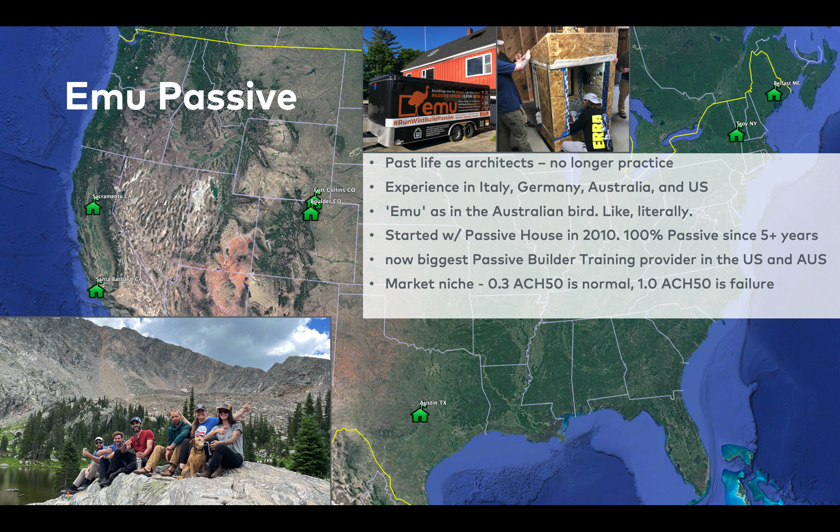We operate in a very niche market where we're lucky because we attract builders and projects that specifically want to go above and beyond, meaning that to us it is normal to achieve 0.3 ACH50 at the blower door test instead of 3 ACH50 that is code minimum. So our buildings are built extremely better than code minimum. In this context, hitting 1 ACH50 is basically a failure because passive house is 0.6.

As I said, we feel privileged because it feels like we may be trainers of Olympic athletes. We attract very smart builders that want to go above and beyond and take pride in the quality of their craft. That is very rewarding to us, and what I'm going to present today is framed by operating in this niche market. That is how we hope the market is going to be in the future, where builders have extreme pride in what they're doing and they're delivering great projects supported by the passive house building science.

So today we're going to cover how a performance-based building science handrail can help projects improve not just in terms of energy efficiency and environmental impact, but also how to improve the living conditions for people inside buildings, based on the most recent and up-to-date building science, something that building code is decades away from adopting.

Start with this question: why do we put numbers on money bills? Money is a very important commodity, and why do we put numbers on it? In my opinion, George Washington was a much better president and person for the country than Benjamin Franklin. So, in my opinion, George Washington is a much better bill than a Benjamin Franklin. Now, would you give me one Benjamin Franklin in exchange for one George Washington? You wouldn't do that.

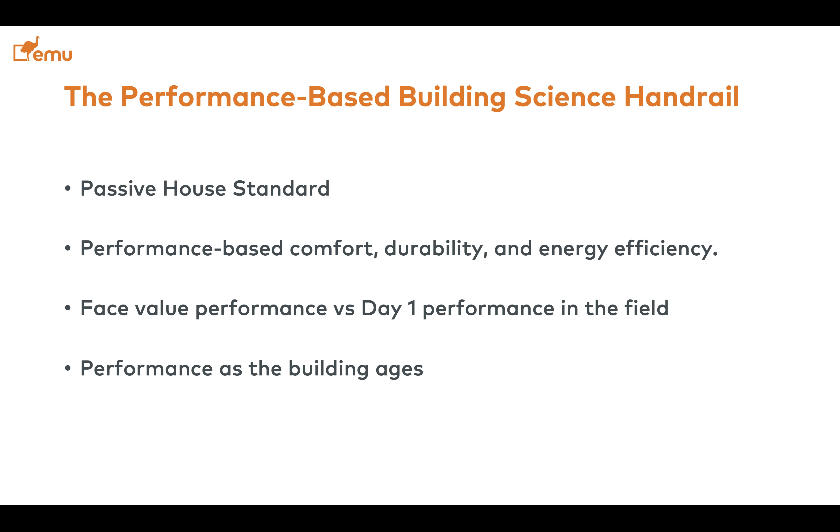So this is a short summary of what I'm going to present on today. I'm going to touch very shortly about the passive house standard, what it is, talking about performance-based approaches to comfort, durability, and energy efficiency. Then look at face value performance of certain products as opposed to how those products actually perform in the field at day one, as well as how this performance ages over time once the building gets older.

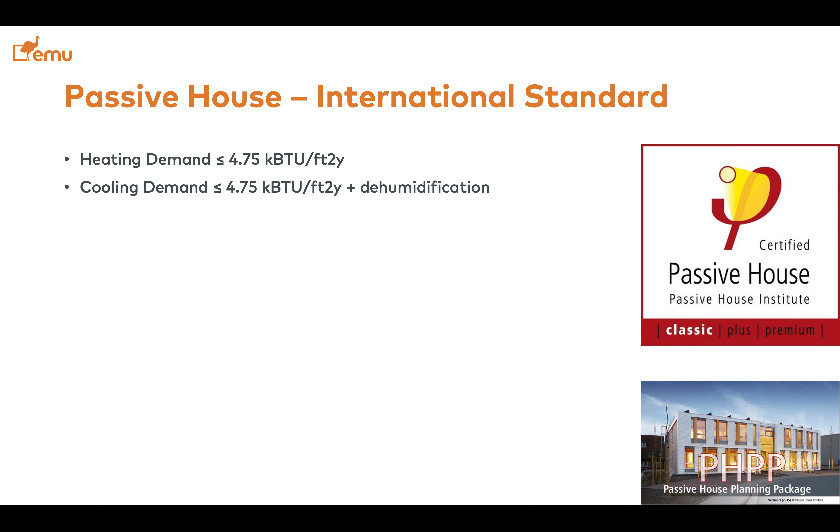So this is the definition of the International Passive House Standard. A building can be certified if it has a heating demand of less than 4.75 kilobtu per square foot a year, as well as a cooling demand of less than 4.75 kilobtu per square foot a year, plus some additional allowance for climate-specific dehumidification, primary energy less than 19 kilobtu per square foot a year, an air tightness level of less than 0.6 air changes per hour at 50 Pascal as measured at the final blower door test.

Then there's a specific criterion for indoor air quality that requires continuous balanced ventilation through an ERV or HRV system. There's a comfort criterion which impacts the selection of windows and doors that is specific to the climate. We're going to see that today, as well as prevention of mold and condensation by design, which is called the hygiene criterion. Hygiene is absence of mold and condensation.

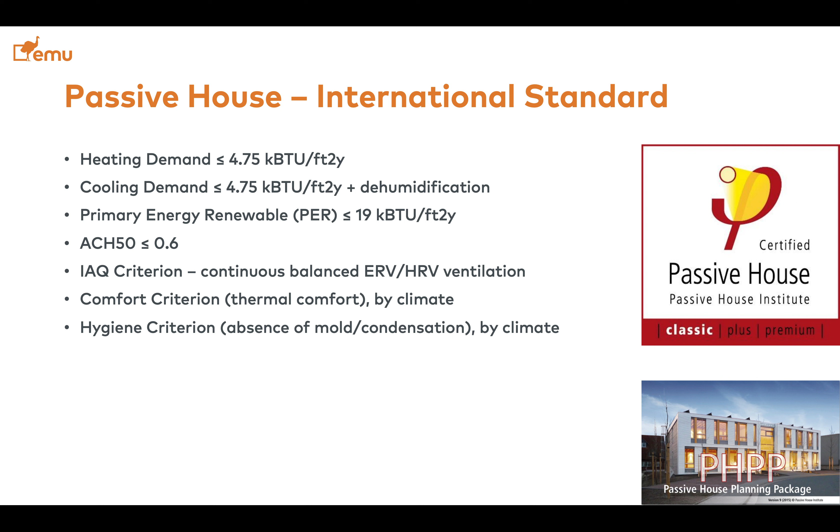And this is an analytical approach to preventing mold and condensation that is decades further advanced than what building code currently requires. So it is a way that we professionals can advise and inform decisions of our clients and our builders on how to prevent mold and condensation proactively, as opposed to just building the building and hoping nothing bad is going to happen.

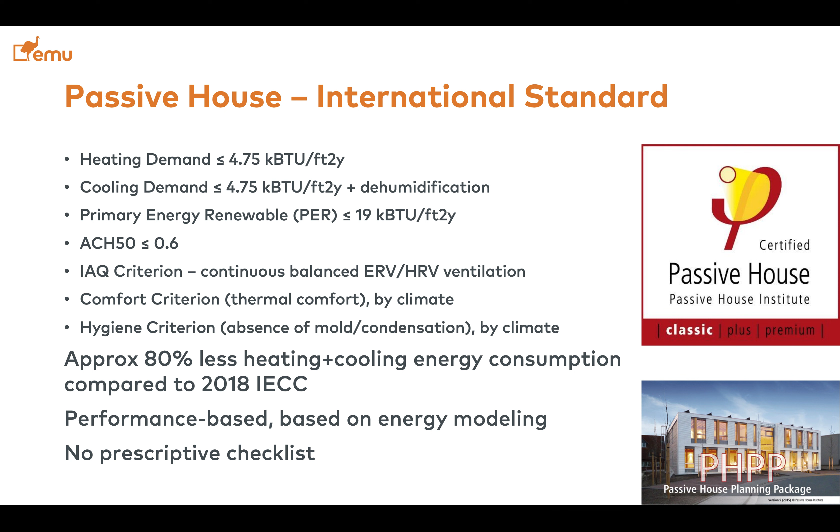Coming from Europe, in Europe there is no prescriptive code compliance. It's all performance-based. And when I think about the prescriptive approach, it's when you already know the answer before you even formulate the question. Think about a project in climate zone 4, where your walls are R20, and your ceiling is R49.

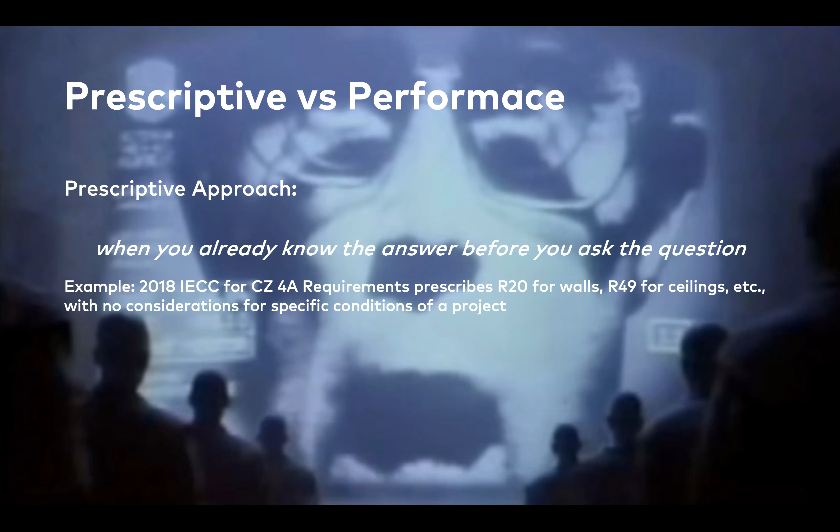This takes no consideration of what the project actually looks like. It does not consider at all the design, nature, exposure of that specific design. It does not ask a question, it just gives you the answer. Your climate zone 4, R20 for your wall, and R49 in your ceiling, and all the other requirements. And to me, that is a very dumb way to approach performance and building science, because you literally don't ask questions. You just have a set of prepackaged answers that you distribute flat by climate zone, as opposed to a performance-based approach where you actually listen to the question before you formulate an answer.

We're going to see what that means later today.

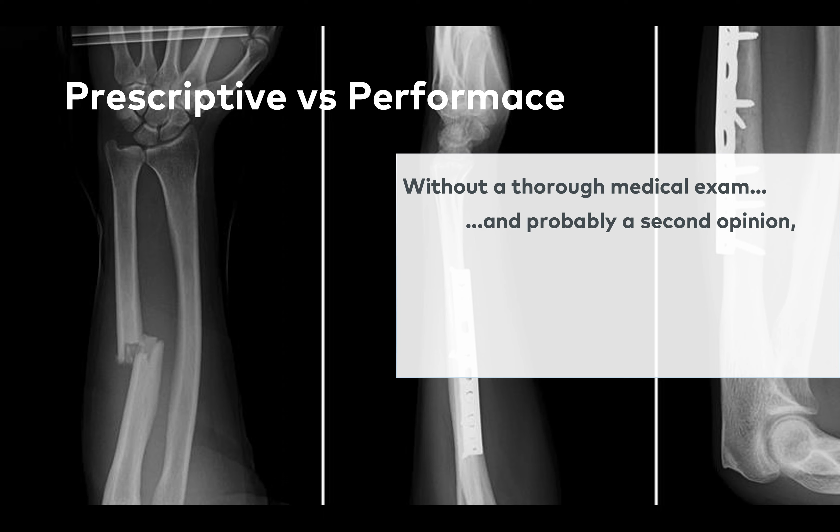Think about an analogy with the medical world. Without a thorough medical exam and probably a second opinion, would you ever start an expensive medical treatment, take restricted medical drugs, or undergo serious surgery without an actual medical exam first, and possibly asking a second doctor for their opinion? That is what the prescriptive method is.

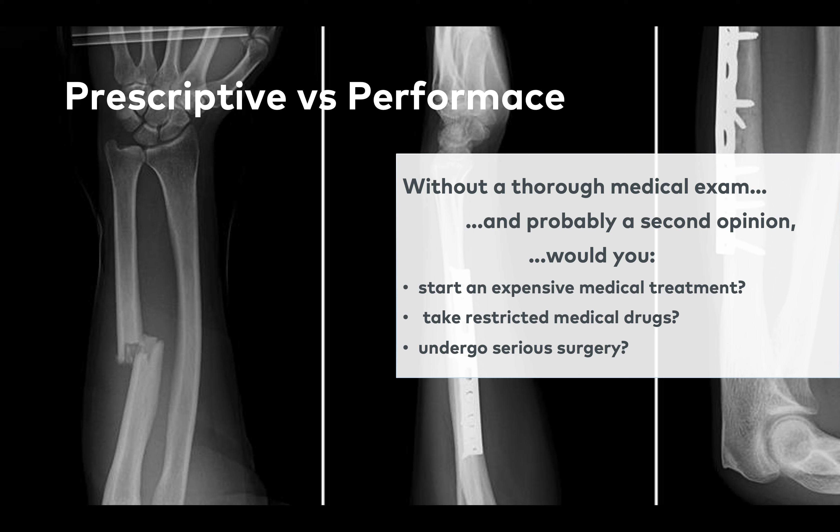To draw an analogy with the medical world, energy modeling is similar to having a thorough medical exam that tells you how things are going. This picture has X-rays because I see the energy model as X-rays of your building. It tells me how different components are performing with regards to different metrics: thermal comfort, avoidance of mold condensation, as well as energy efficiency. Once you have the information from that exam, you can make informed decisions about how to move forward. If you don't, you're just guessing.

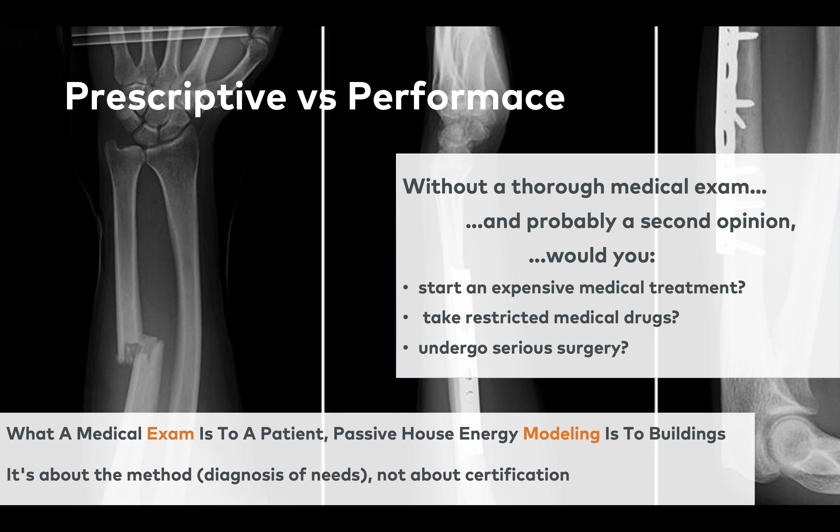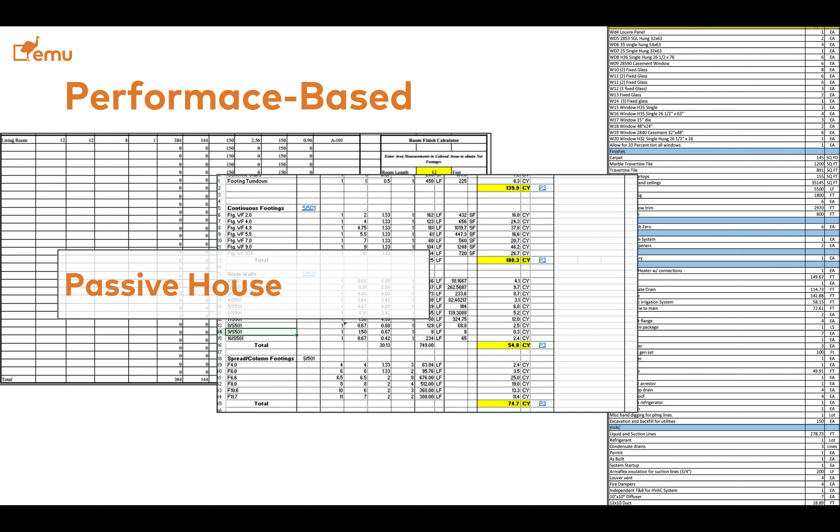Performance-based Passive House involves a lot of numbers, and we're going to see some today. The good thing is these tables are actually not unique to Passive House, they come from construction takeoffs. Builders go through a lot of math exercises with construction takeoffs. So in my opinion, if you have the patience and strength to survive a construction takeoff, you have enough brain power to also go through Passive House and survive, because it's actually very fun.

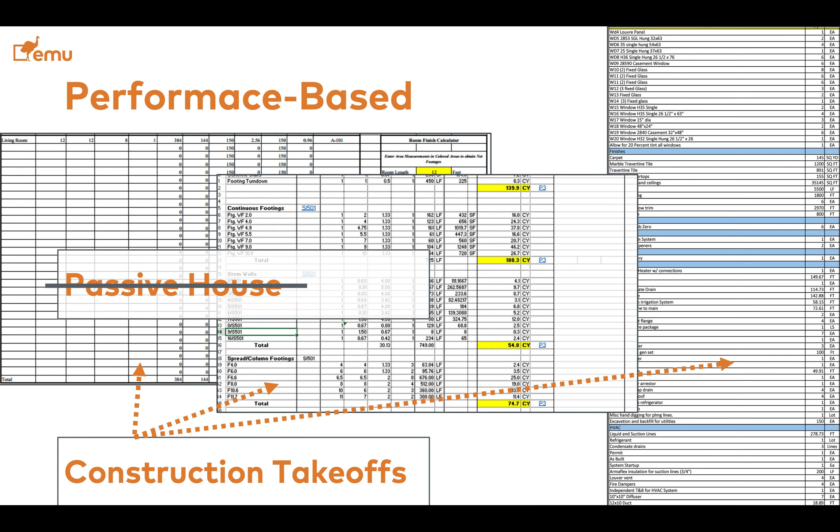Performance in that statement is not just energy, it's also thermal comfort. We're going to see how that greatly impacts the selection of windows and doors, which is one of the most expensive line items of the entire budget, as well as indoor air quality and energy efficiency.

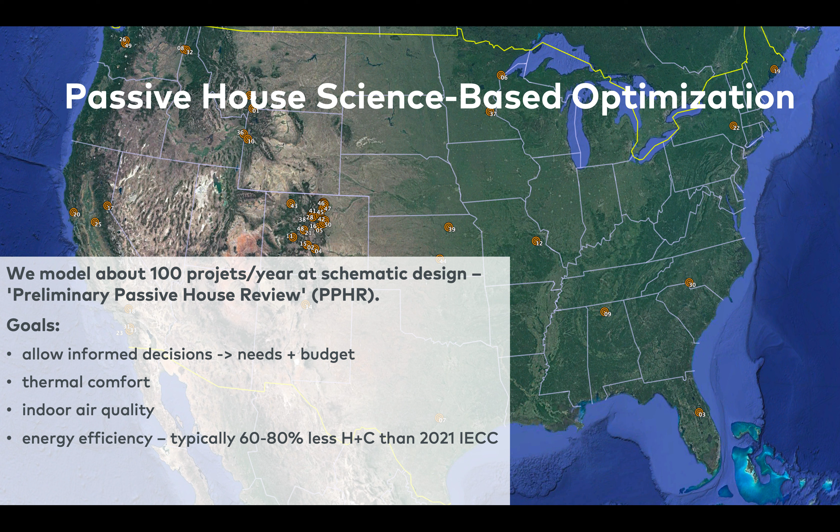In doing that, we typically see these projects reducing the need for heating and cooling by about 60 to 80% compared to even the 2021 energy code. So great opportunity for improvement compared to code minimum compliance. About 20% of these projects we actually recommend certification and support them through construction. For the other 80%, this process at the early stage allows them to really narrow down what they need so they can make informed decisions on how to develop the project and budget further past schematic design, and optimize performance for their climate as well as the project-specific goals.

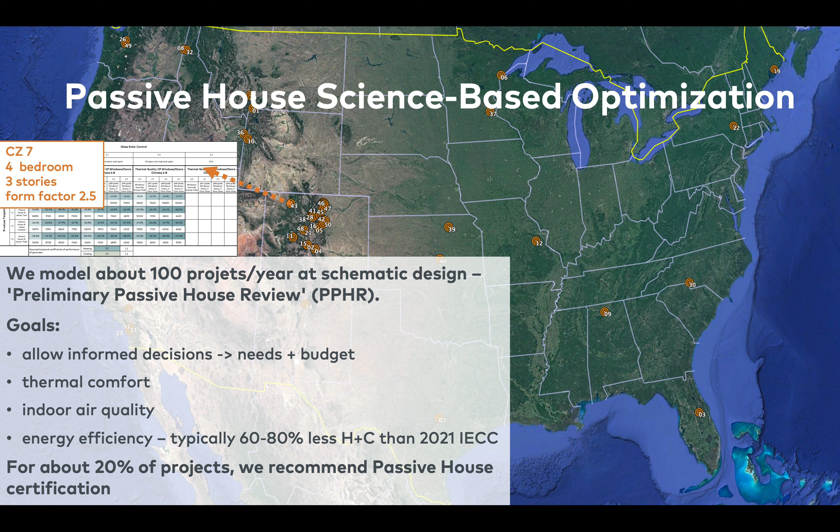Top left is an example, one of the many projects we model. A project in Climate Zone 7, 4-bedroom, 3 stories, form factor of 2.5 — we ended up speccing triple pane windows, high solar gain glass, R60 walls, etc. Another one, for Climate Zone 2, was a much smaller unit: 2 bedrooms, 1 story, form factor 3.8, and we ended up speccing double pane windows, low solar gain, R20 walls, etc.

This Florida client was excited about being the first project in Florida to use triple pane windows for Passive House — and this project is going to be certified. He said, 'Oh yeah, we're gonna be the first one to use triple pane windows.' I said, 'No you're not, because you don't need that.' And if you don't need something, then don't buy it.

What is the need about windows and doors? Why do we need triple pane windows? We don't need triple pane windows, we need to feel comfortable. Passive House provides the science that allows you to determine the minimum performance for windows and doors you need in order to get comfortable. In Florida's case, it never gets that cold, so you don't need the extra thermal protection of triple pane windows. Whereas for the project in Climate Zone 7, which is super cold, we definitely need that thermal protection. This is an example of how an energy modeling, Passive House-based approach helped two different projects make decisions in terms of identifying what they need and allocating budget resources to meet them.

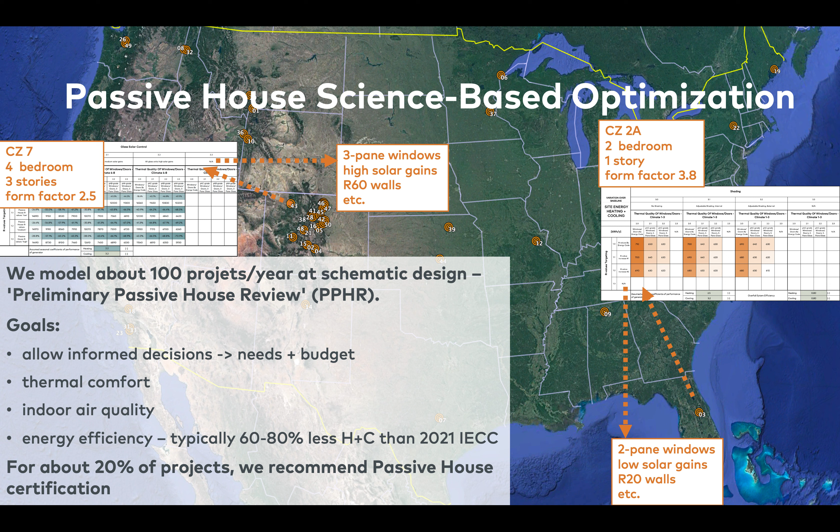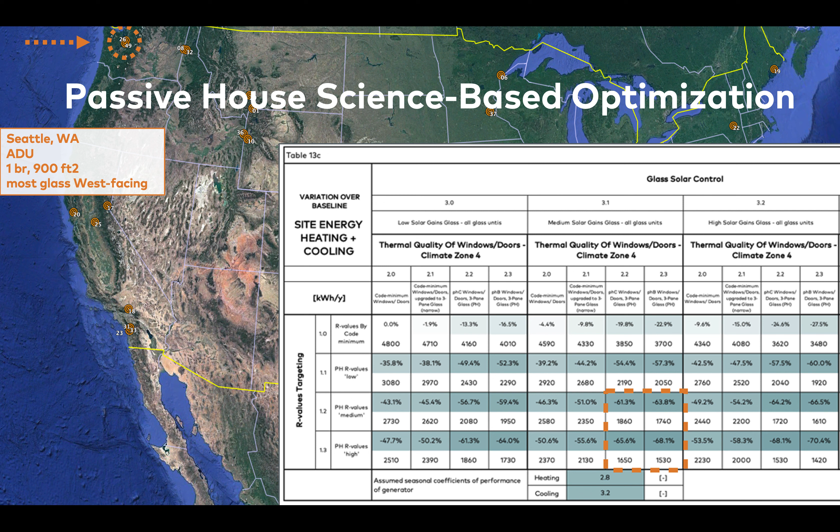More importantly, we did a thorough analysis on comfort. So in the metrics we cover, we provide recommendations for the window package in order to determine the comfort requirement, then we looked at how to optimize the glass for year-round performance. We called out low solar gains, medium solar gains, and high solar gains.

With the premise that most glass is facing west, if you don't have the support of an energy model, you may believe that you want all of your glass facing west to be low solar gains, so you block off a lot of that heat in the summertime. At face value, that is what you may think if you don't have an energy model to give you answers. So if you're pulling numbers out of your butt, you may think west facing always means low gains glass, which really depends on the climate.

This is Climate Zone 4C, and this building is in a city. This building is not in a vacuum, we're not building on the moon here. This building had other neighboring buildings around it and trees, which caused shading. So the models showed that even though most of the glass was facing west, for the best performance for heating and cooling, going with medium gains was much better than low gains. This is something that only the energy model can help you navigate.

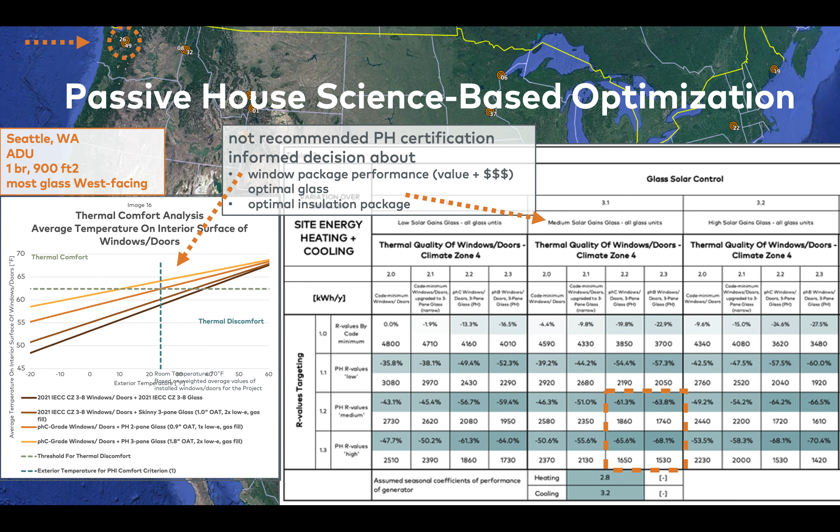This is a market, the high performance market, where the moment you start wanting to invest more money in a project, you'll find plenty of people that want to help you do just that, spend more money. Whether you get to the actual performance goals that you want to achieve, that is a completely separate matter.

This passive house modeling-based approach really provides you the ability to quantify the impact of option A over option B and C. So how much does option A change things, and how much does it matter compared to B and C? If you don't have an energy model, you don't have an analytical way to address that. So it's not that we just like energy modeling, we don't like to make up stuff, we use the science to help clients make informed decisions.

This slide shows the range we're working in in this market today. At the bottom, we see building code, the minimum level of performance you are legally allowed to build today. In other words, a code minimum building is the worst building that you are legally allowed to build. That is literally the definition of building code. Then on the other end of the spectrum, we have the gold standard, passive house, which compared to the 2018 and 2021 code allows a reduction of about 80% for heating and cooling.

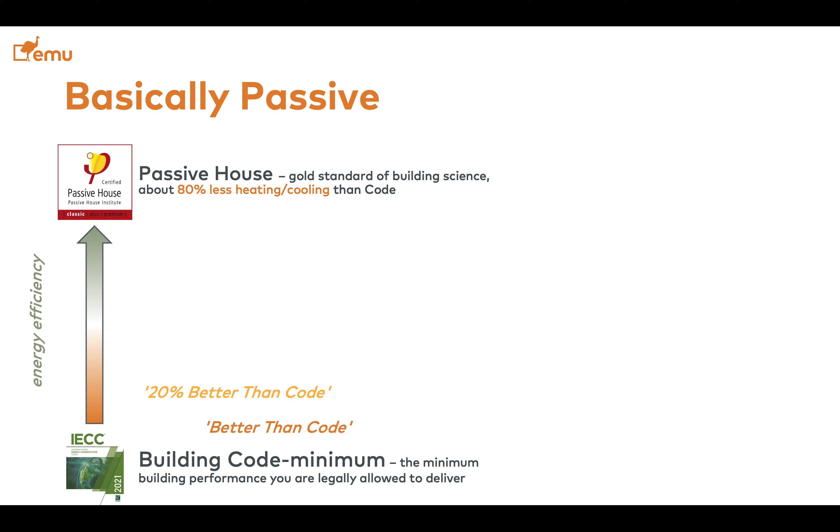Now, in between the two, there's a number of foggy, undetermined definitions or names that kind of confuse the market. 'Oh, my building is better than code.' 'My building is 20% better than code,' based on having done no modeling, so you don't actually know what you're talking about. 'My building is high performance.' We literally know builders that put a quarter inch more insulation than code minimum, and they call the building high performance. And that is high performance, it is higher performance than the code minimum, so they can say that.

Is that passive house? No. Is that actual high performance? It depends, it's not really. It can be all the things. Literally anyone down the street can claim they have a high performance building if they put an eighth of an inch more insulation than code minimum, and that is higher performance than code.

There's super insulated, there's super tight, zero utility house, passive solar that is basically passive but haven't done the modeling. All of these we call the floaters, meaning they float in between the code minimum and passive house. And there is some substantial risk there because you don't have structure.

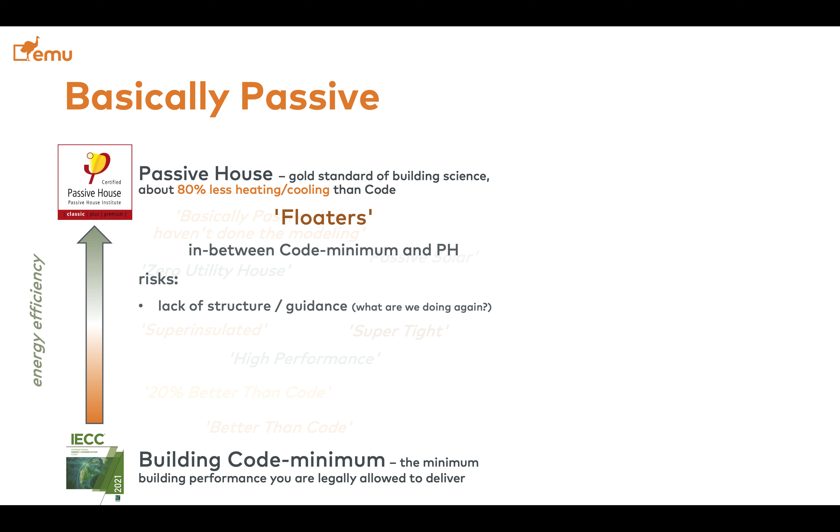Building code does provide you structure, it provides you a minimum that you cannot fail. Passive house does provide you structure, it's basically a performance-based building code of the future, and it provides you with very strict requirements that on a performance-based approach you can meet. Those are structures. Anything that floats in between passive house and code does not have this structure. So what are we doing again?

It's very difficult to define expectations with the client. If you want to do code minimum or passive house, you have very specific goals. If you don't have these specific goals, everything becomes foggy and unclear, and it becomes very difficult to determine expectations with the client.

It's very easy to overpromise and underdeliver. We're going to see an example of just that today. And it's also very easy to overkill and overpay, for example, for the window package. The client down in Florida wanted to get the triple pane, and had we not done the thermal comfort analysis, they may have gotten the triple pane and spent thousands of dollars more on windows that was unnecessary for the climate location. And it can be underkill in terms of indoor air quality and moisture management.

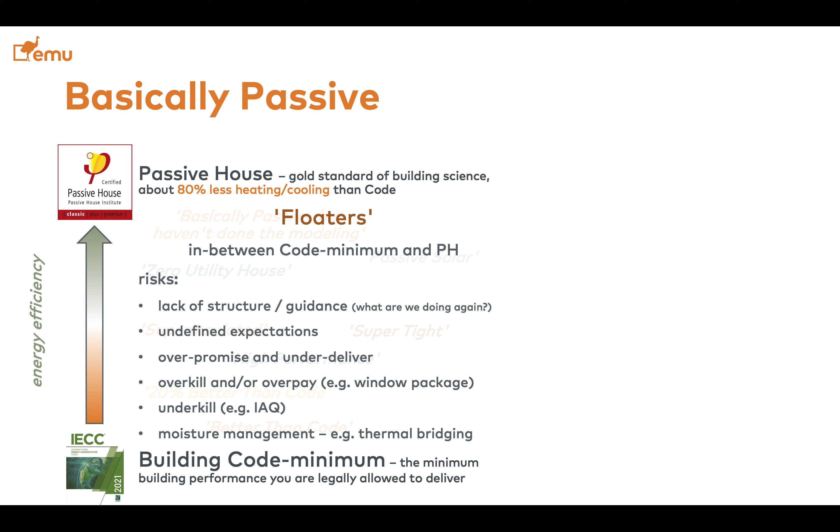Now, think about the analogies that we did for the medical field. Think about going to the hospital - what makes you feel most confident about the competency of the doctor? 'Your arm is broken' or 'your arm is basically broken.' Which one of these makes you feel more confident about the competency of that doctor? It's broken, versus it's basically broken.

This is the same situation we see in the building market. It's better than broken, it feels like it's broken, and you know X-rays are bullshit. And what MD degree, don't you see the scrubs? There's a lot of fun you can have, but think about what you hear in the market. Like, oh, it's high performance. Oh, we don't need to do the modeling, I know what it is. And that's bullshit.

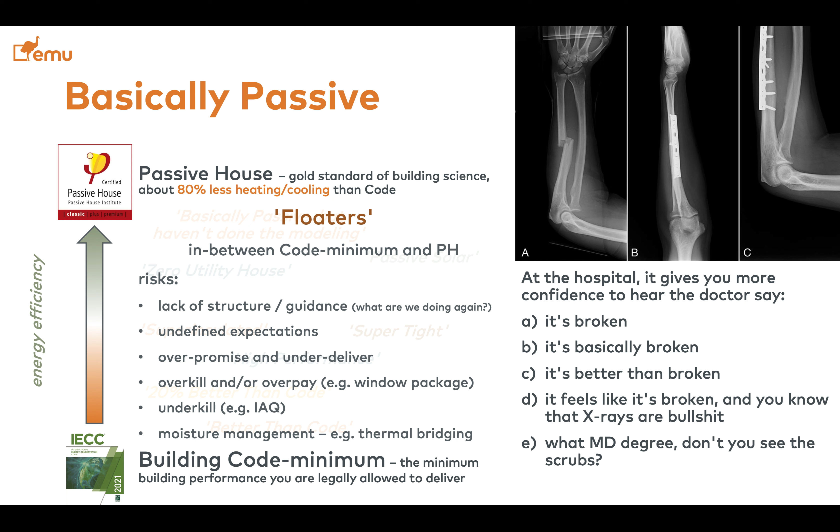At the end of the day, we're making a promise to our clients, and we need to deliver on that promise. This is all what this is about. Whichever the promise is, we need to deliver on that, whether it is passive house certification or not, or code minimum. We promise A, we need to deliver A.

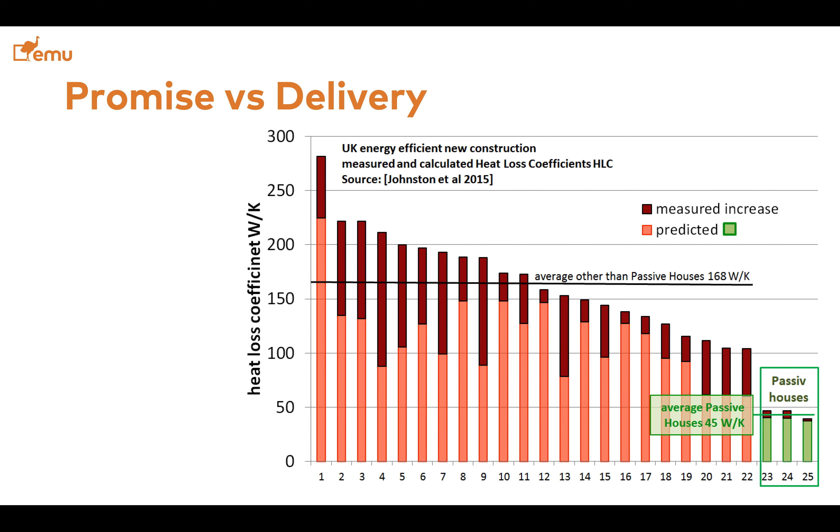This graph shows data collected from 25 buildings in the UK, where there was an expectation as far as energy consumption, and some buildings greatly consumed more energy than what was anticipated. So we have the promise - hey, your building is going to need this amount of energy - and there was under-delivery, where that building actually consumed a lot more energy than expected. This is called the performance gap.

Now, this graph also shows a few passive house buildings where, because of a number of reasons, the gap was the narrowest on record. This is typical for passive house, where it's a much more detailed, performance-based approach. It's very strict in terms of requirements and quality assurance, and so what you actually promise, you do deliver, as opposed to over-promising and under-delivering.

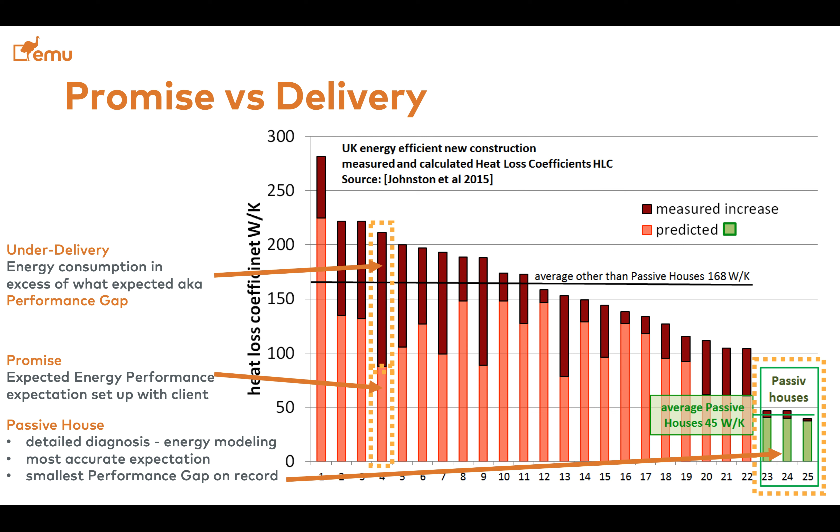Now, to make this a little bit more fun, I created a little story to describe a process, to illustrate how things can go well or poorly depending on the approach you take on a project. So I made up the story of two twin brothers. One is Enrico - that's me, and Enrico has an accent, as you can tell. He's very much a square, and he's contracted to build a passive house. His very evil twin brother, Enrique, also has an accent, Googles a lot, and is contracted to build a house identical to Enrico's. This is how the story goes.

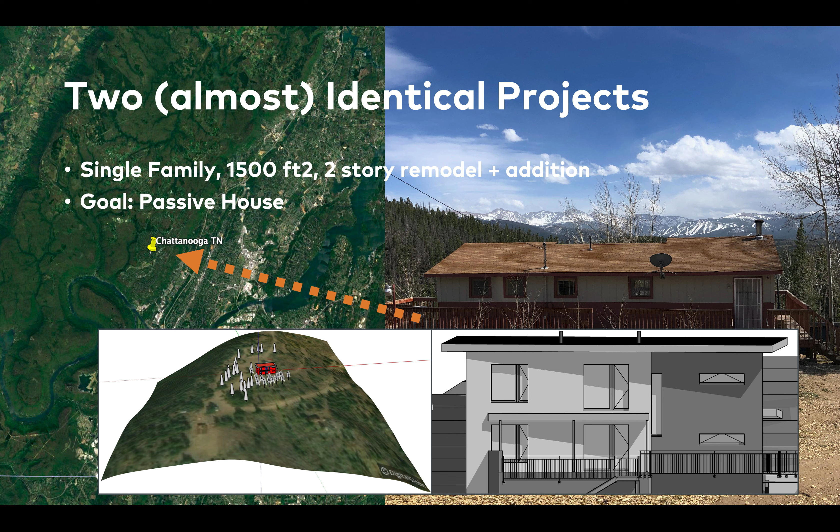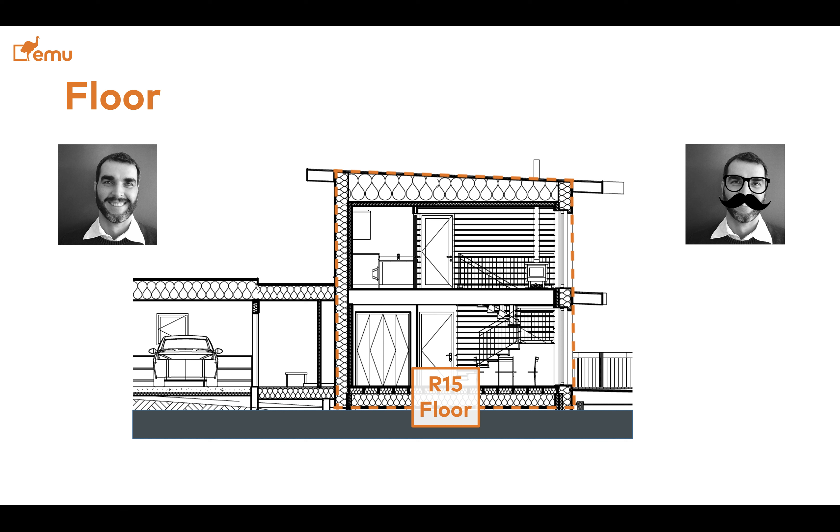So I'm on a ridge, there's trees around, some of them evergreen, some deciduous. Starting from the bottom up, for the floor in Chattanooga, Tennessee, which is climate zone 4A, I need R15. So Enrico picks 4 inches of EPS under slab, and Enrique chooses 3 inches of XPS under slab.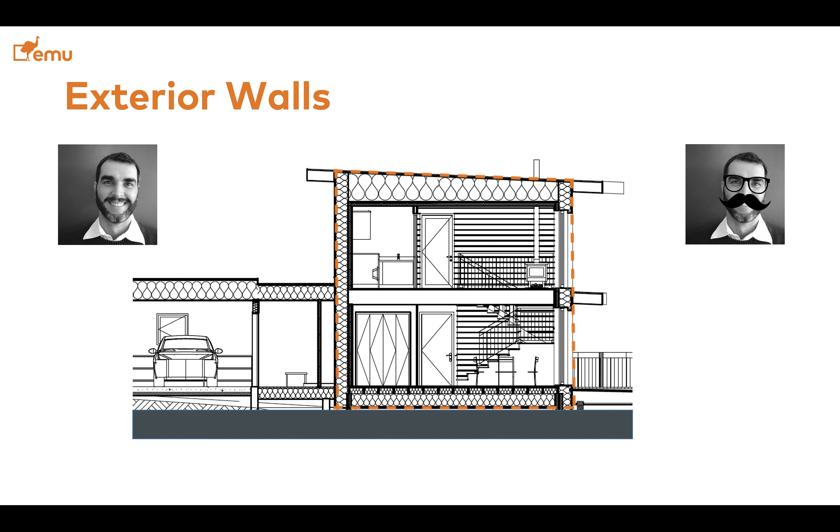For the exterior walls, we need R30. Enrico picks a wall consisting of drywall, dense pack cellulose in the 2x6 cavity, plywood sheeting taped at the seams as the air barrier, and then 2 inches of exterior continuous polyiso insulation under the rain screen. On the other side, Enrique uses drywall as his air barrier, the same dense pack cellulose in the 2x6 cavity, and then uses 2.5-inch zip R sheeting as the continuous insulation, and over that goes the rain screen.

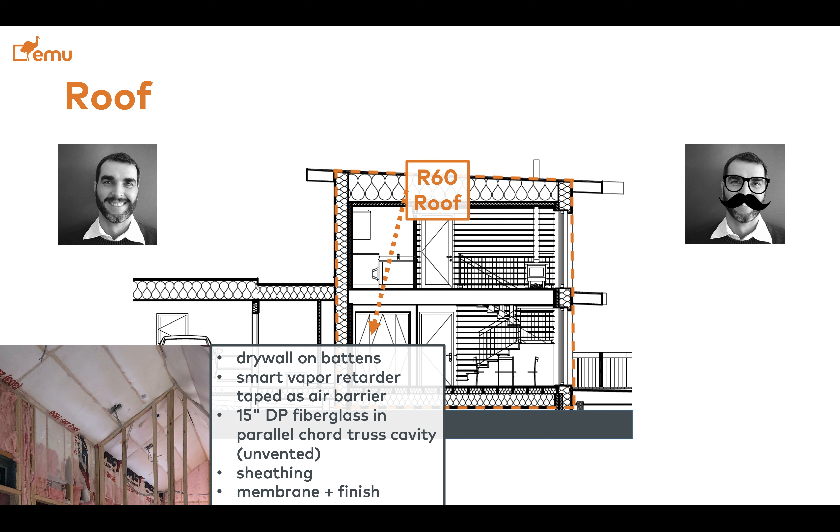At the roof, we need an R60. So Enrico uses a smart vapor retarder as the air barrier and 15 inches of dense pack fiberglass in an unvented roof assembly. Whereas Enrique uses drywall as the air barrier and then 8.5 inches of closed cell spray foam, sheeting, membrane, and finish.

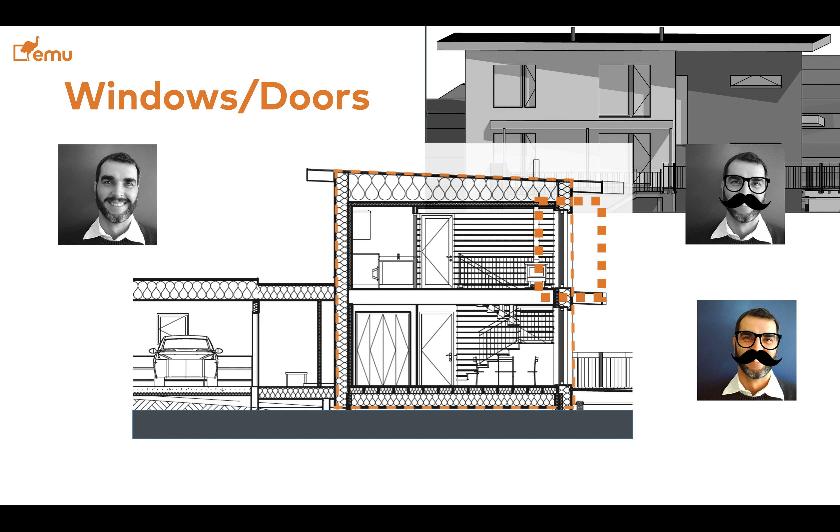Windows and doors, keep in mind what this south elevation looks like. Enrico is not that concerned about overheating, whereas Enrique is. Enrique uses C-grade passive house frames with warm edge spacers.

We don't have too much time to go over this today, but keep this in mind. Enrico uses beefy triple pane glass, so the overall thickness of the glass unit is 1.8 inches, basically 2 inches of glass assembly, with 90% argon fill, medium solar gains, and an inward window install. We'll cover that later, but you see the building section here where the window is installed in the middle of the insulation thickness. Enrique, on the other hand, also uses a C-grade window frame with warm edge spacers, but uses a skinny triple pane.

So the overall thickness of the glass unit is 1 inch instead of the 1.8 inches for Enrico. Enrique googled and found that somebody on the internet says the argon gas goes away after only a couple of years, so it's not worth investing the money. So Enrique uses air-filled window glass instead of argon.

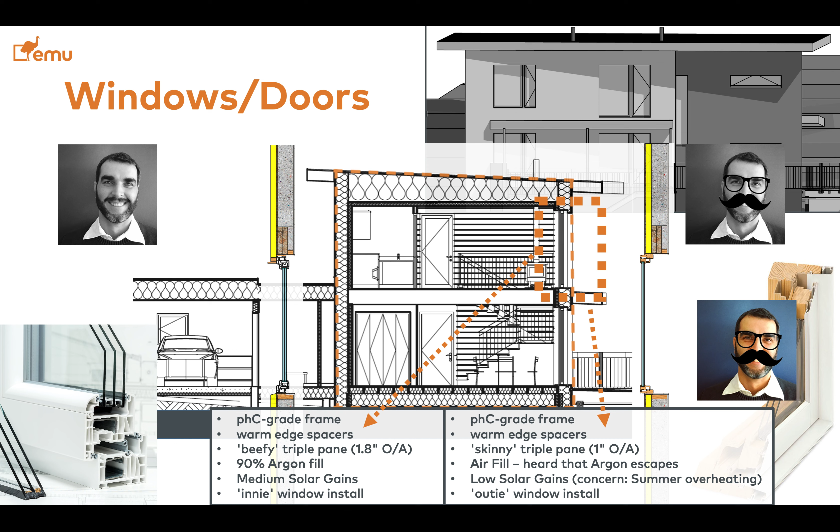In terms of heat recovery ventilation, Enrico chooses a ducted ERV with 87% heat recovery and a MERV 13 intake filter, whereas Enrique uses a ductless HRV with 89% heat recovery. We're going to see what that means.

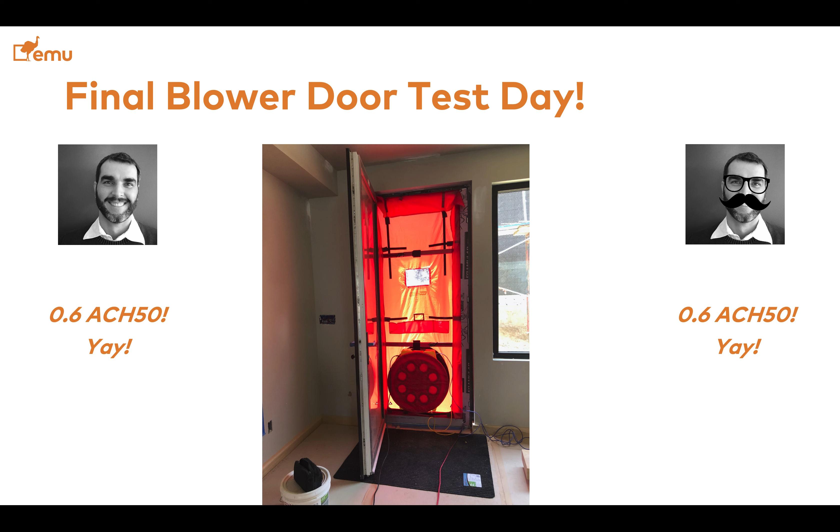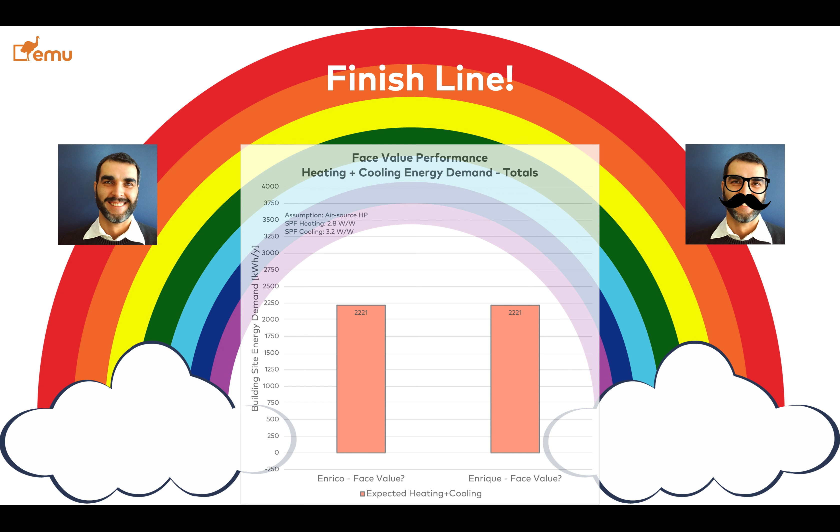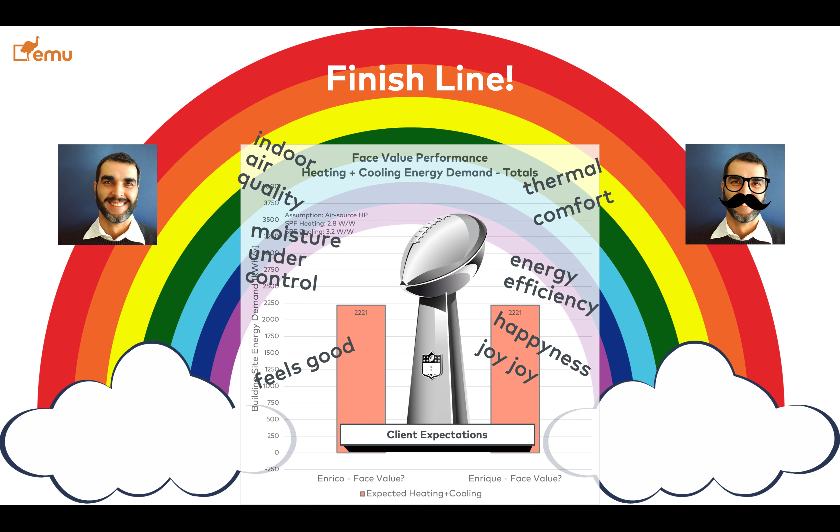They build the building and get to the final blower door test. Enrico gets 0.6 ACH50, yay. Enrique also gets 0.6 ACH50, yay, everything is happy. At this point, both of them reach the finish line of the project, and at face value the two buildings perform the same. So we're happy, we've met the client expectations, we have indoor air quality, thermal comfort, moisture under control, energy efficiency. It feels good, happiness, joy, puppies, kittens, yay.

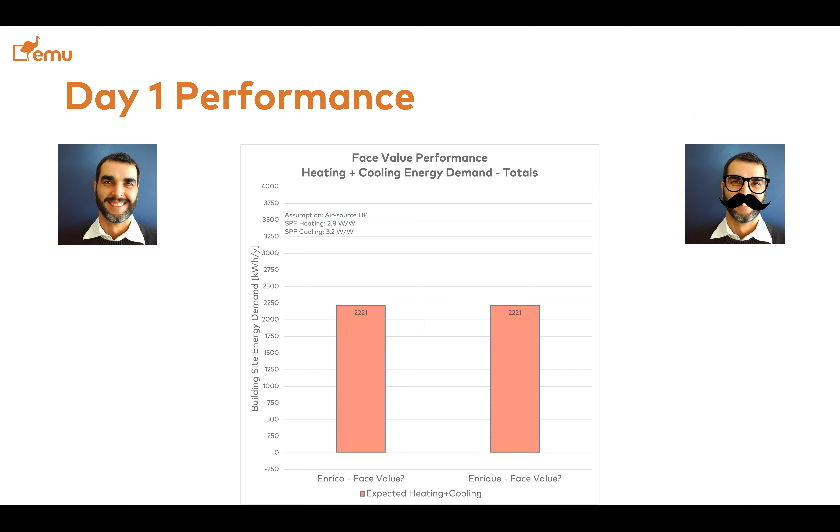It feels good to finish a project, until it doesn't. Day one, things start to go poorly. Enrique's client starts seeing that the energy consumption is actually much higher than anticipated, actually two-thirds higher than expected. Let's see what happens.

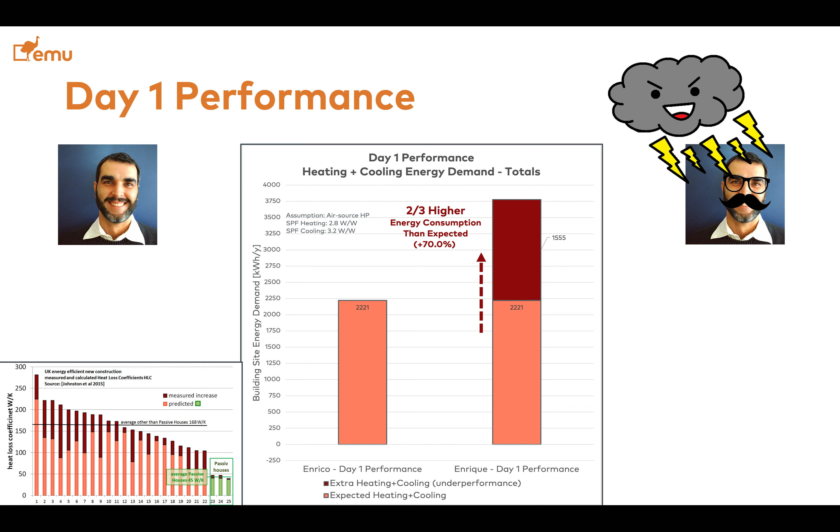This is the relationship we were talking about, where we make a promise and have to deliver on it. In this case, we under-deliver, in that the actual energy consumption is much higher than anticipated. In addition, Enrique's client has condensation and is very uncomfortable because they feel cold in the house. Let's see what happened.

Enrique was good enough to Google which metal is least bad, and stainless steel is the least bad metal out there, less bad than regular steel, less bad than aluminum, less bad than copper. These are all metals used in construction, and we see this all the time with builders who post photos on Instagram like, 'oh, this is my metal sill pan under my window' — you are shooting yourself in the foot. They don't actually know what they're doing.

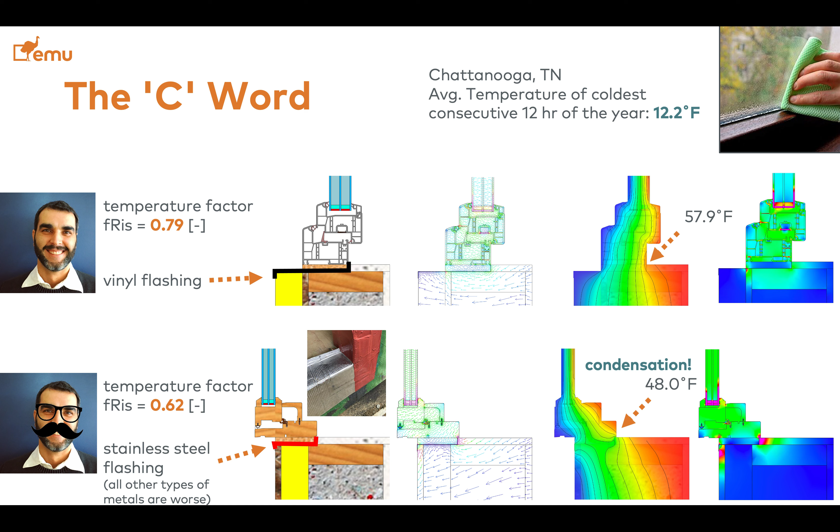And passive house, this is one of the hard requirements for certification. You do not need to certify, but you want to use this science to prevent mold and condensation. And building code is decades away from adopting this. So you can definitely have a building that is moldy and does comply with the most recent energy code.

Then the second line item, before we get to energy efficiency - the first one was condensation, the second one is discomfort. And at face value, they both picked triple pane. So this is one of the things that throws most first-time builders off. You are getting a triple pane window, you may get a good one, and you may get a pretty poor one, and you're still paying the premium for the poor one.

So this is why it's very important to look at this. To deliver a higher quality product, you need to have a much smarter, more intelligent approach to it. Higher quality products don't happen just randomly. You just have to have a much more thorough approach to get there.

Now, Enrico, on the left, has a beefy triple pane, it's filled with argon, has low-E coating, and has an innie install, meaning that the window is in line with the middle of the insulation. Enrique, on the right-hand side, also has triple pane, but it's a skinny triple pane. It's filled with air, has low-E coating, and has an outie install, meaning the window is installed all the way to the outside. And the U-factor is basically the amount of heat losses that we have through that window.

So if you see a U-factor, think about losses - the higher the heat losses is bad, and the lower heat losses is good. So nominally, both windows are triple pane, yay! But if you look at the actual losses, the one on the left that Enrico picked has 0.13 heat losses, BTU per square foot per degree Fahrenheit per hour. So 0.13 as opposed to 0.26 of the other triple pane.

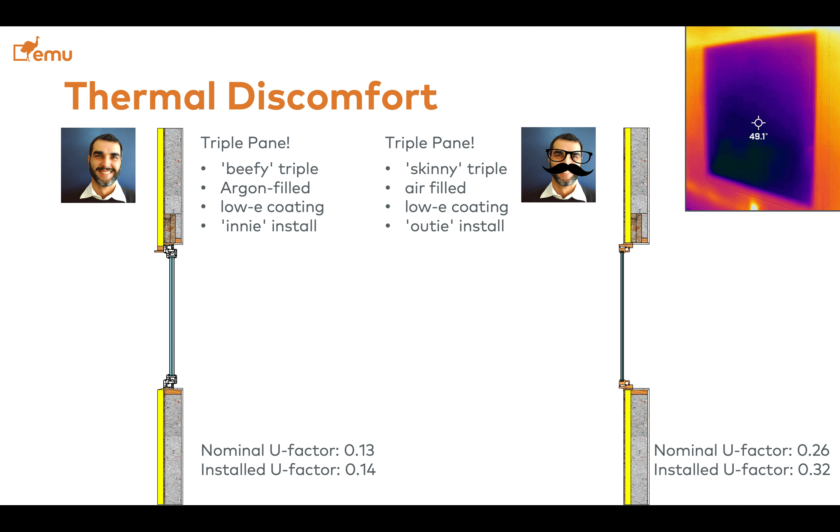So the triple pane that Enrique picked, probably because it was cheaper, but not necessarily - some skinny, bad triple panes are actually more expensive than the good ones - actually has twice as much heat losses compared to the losses that Enrico's windows have.

And if you think about the infrared view, these two isotherm views, the rainbows here, show the black lines. The black lines are called isotherms. Those are lines with the same temperature. And isotherms are like lazy - they want to go slow and straight, they don't like to make curves. If the isotherms make curves in your model, it means that something is not going well, and that causes condensation or higher heat losses.

So on the left-hand side, Enrico has chosen to install the window in the middle of the wall insulation thickness so that the isotherms are going to go straight. So if you look at the isotherms at the bottom left, they're pretty straight in the middle of the wall, and straight up, if you draw a vertical line over the building section, that is where the glass is, so the isotherms kind of go straight, and they're happy if they go straight.

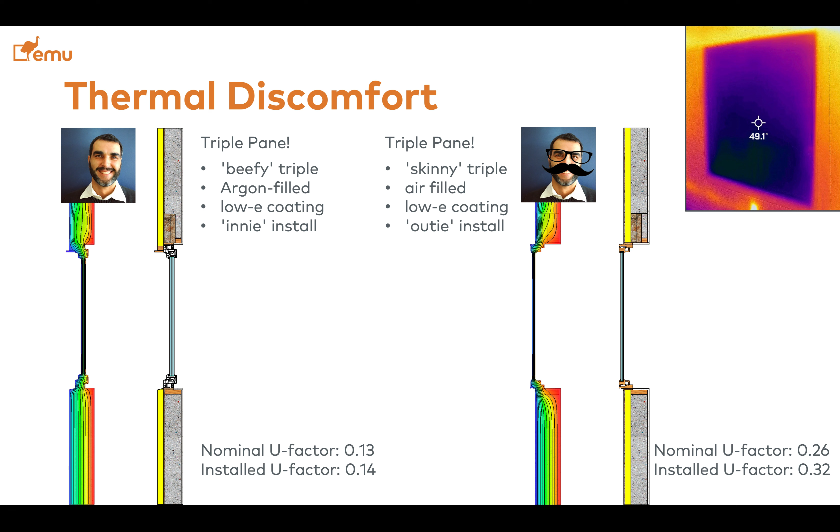Now, Enrique, on the right-hand side, has an outie window installed. And if you look at Enrique's isotherm view, the black line in the rainbow picture on the right-hand side, you see that at the bottom, the isotherms are in the wall. They are nice and straight and go up. And all of a sudden, they have to turn left to get into the frame and then up along the wall, along the glass, and then back out to the right, up to the wall. Isotherms don't like to do that. And if they do that, it means there's a lot of heat losses associated with those changes in direction. And this is something tangible.

The better window with the better glass, with the better installed details, in the Chattanooga, Tennessee climate, with 30 degrees outside and 0.13, 0.14 nominal versus installed U factor, that is something that leads to having an average temperature on the inside of the window of 65.8 degrees.

This is science. This is not a plaque. This is not certification. This is actual building science. Based on the climate and based on the window installed U factor, you can actually calculate and quantify the level

of comfort. And this is something that clients do care about. They will spend more money to get the better window. And Enrique, on the other side, has the skinny glass, has the outie window installed, so he loses more than

5 degrees. His surface temperature is 60.6 degrees. So this is something that is noticeably colder, and sitting next to Enrique's window, you would feel the temperature difference. You feel it because our knowledge of thermal comfort tells us that if the temperature delta between the room average and the cold surface is greater than 7.6 degrees, then our body

can tell the difference and we feel uncomfortable. So assuming a room temperature of 70 degrees minus 7.6 equals 62.4 degrees. So Enrique has discomfort because his temperature is actually lower, whereas Enrico has comfort. This is quantifying thermal comfort.

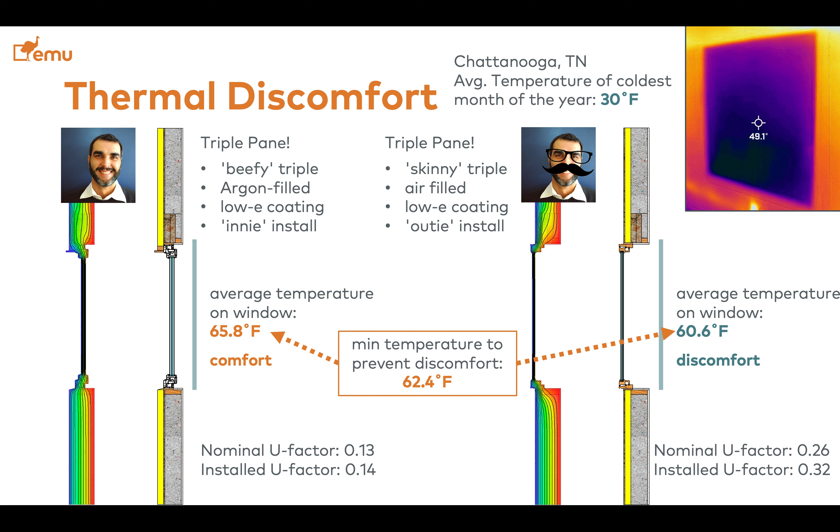So now we are switching to, we looked at condensation, we looked at discomfort, now we're looking at the extra energy consumption. This is the graph showing the underperformance of Enrique's project. And this is the breakdown for heating and cooling, so we can have a better understanding of what's going on.

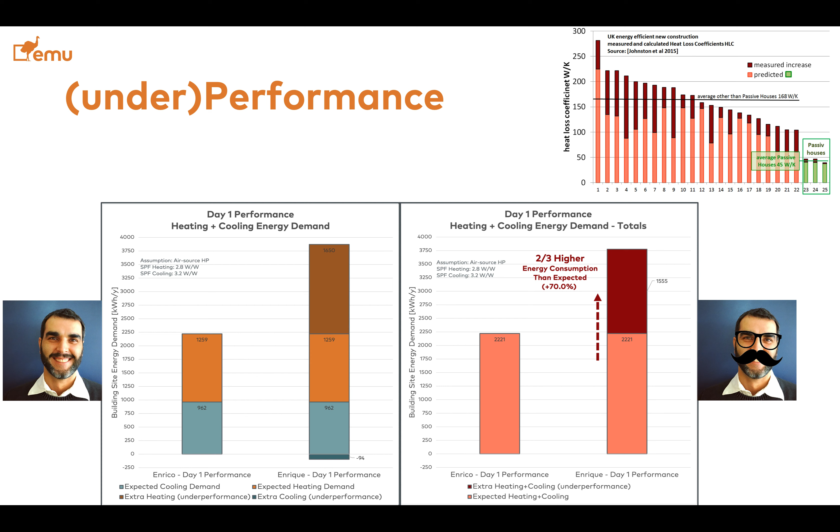And let's go through the different steps that we went through earlier. Starting from the walls, nominally both walls are R30. Enrico has cellulose plus 2 inches of polyiso, and Enrique has the same cellulose and basically 2 inches of polyiso

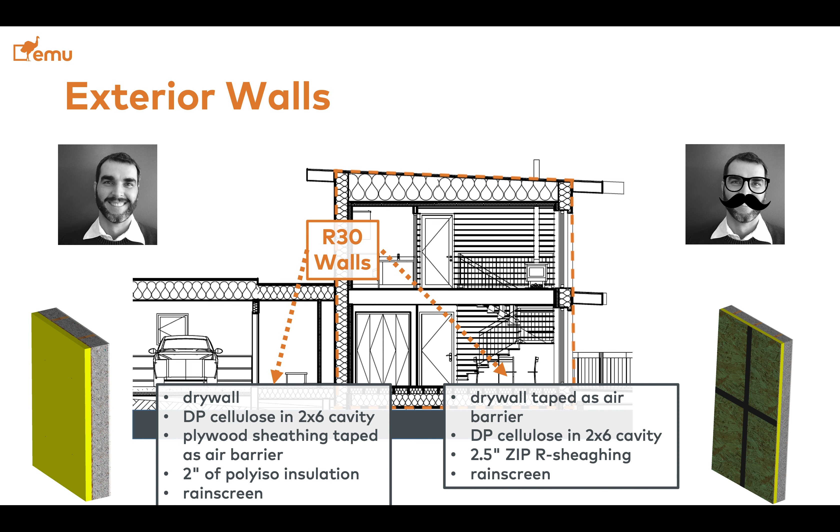installed on the inside of the zip R. But the zip R sheeting is a sheeting, so it gets a lot more nails, about 4 or 5 times more metal fasteners than the same amount of insulation, which is 2 inches of polyiso, that Enrico has. And that amount of extra nails does impact the performance of that R value, which leads to just those nails causing the building to consume about 4% more for heating.

Think about all that metal. There's tiny little heat losses shown here in the 3D model of the zip wall, and those heat losses cause the building to need more heating. Then for the roof,

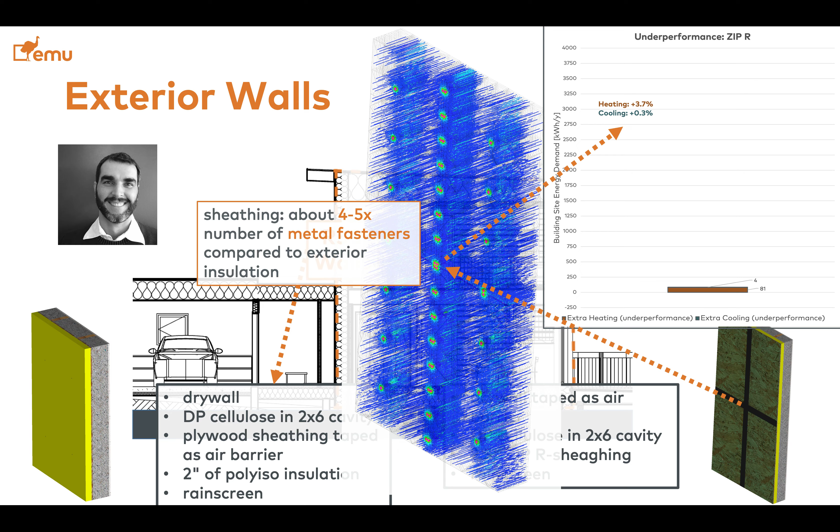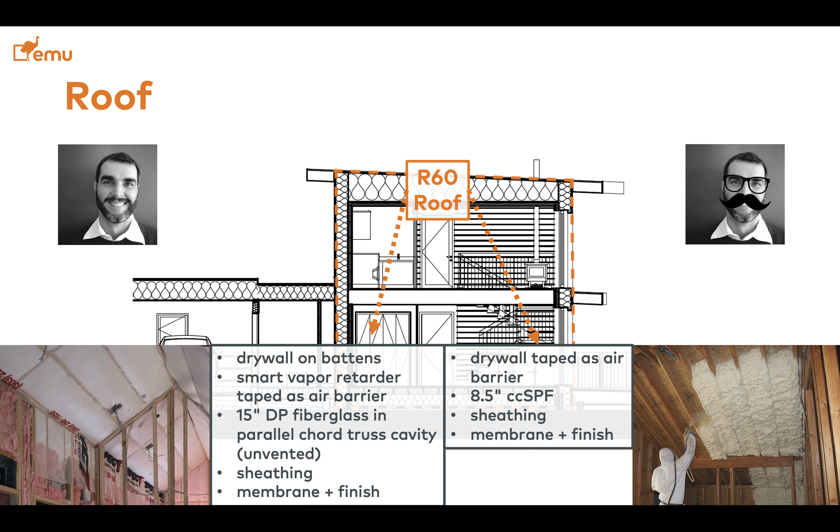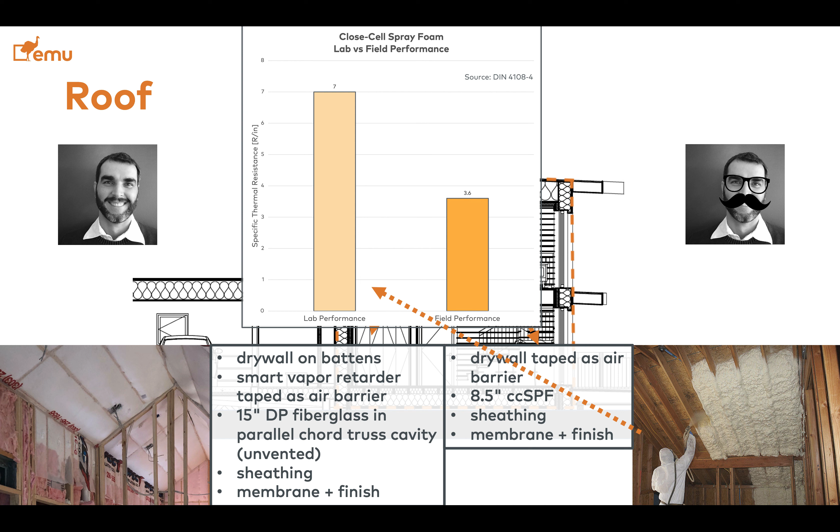Enrico has the dense packed fiberglass, Enrique has the closed cell spray foam, and in a lab, closed cell spray foam performs at 7 R per inch. But in the field, it's actually closer to 3.5 or 3.6. In fact, in Europe, the source here is a German standard. In Europe, spray foam is rated at 3.5 R per inch.

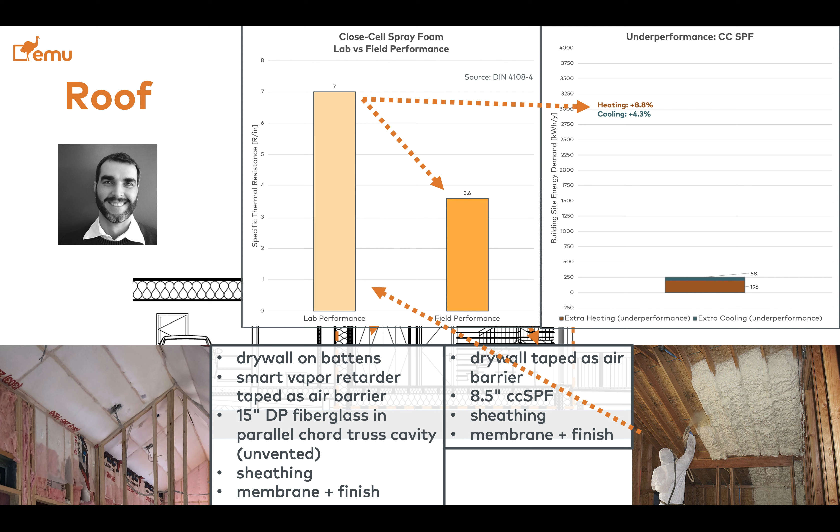So this is something that significantly impacts Enrique's building, causing about 9% more heating and about 4% more cooling needed compared to the expectation. So this is just spray foam that is so difficult to do correctly in the field because of temperature and moisture that it's very easy for spray foam to underperform, and this is the impact that it has on the performance of the building.

Then when we were looking at condensation, we looked at the metal sill pan under the windows, which has a dramatic impact on condensation, whereas in terms of the whole building heating and cooling demand, that little strip of metal under each window causes about 3% more heating. So this just adds another drop to the bucket.

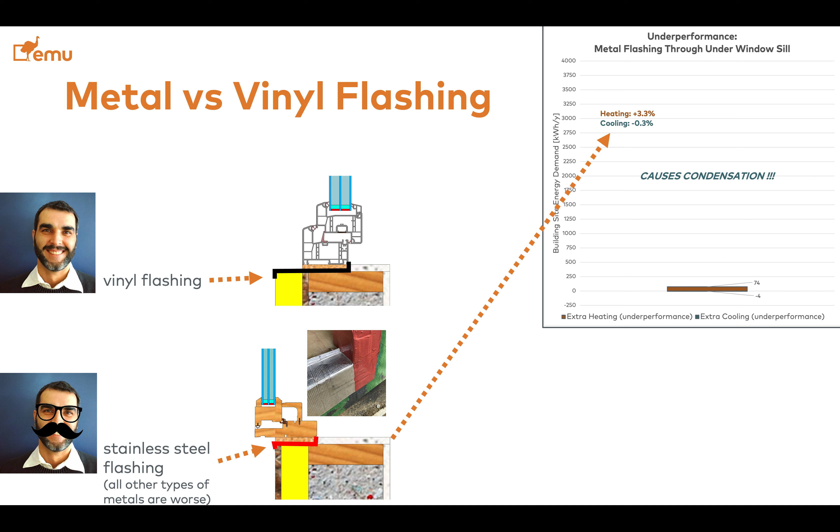Then the install position, all the way to the outside for Enrique and in the middle of the wall for Enrico. This is the isotherms we looked at earlier. And this offset from the plane of the optimal isotherms that Enrico chooses causes a significant increase in heating, about 11% more need for heating for Enrique, just because he chose to install the windows all the way to the outside.

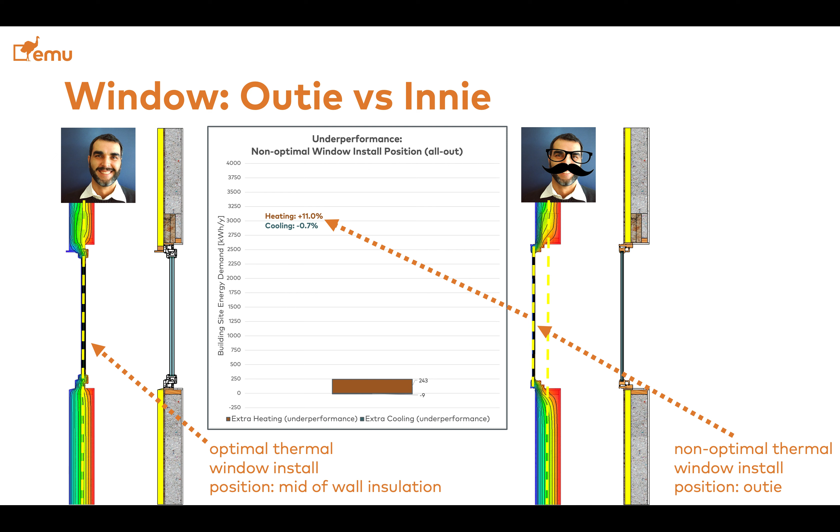For beefy, I mean 1.8 inch, almost 2 inches, whereas skinny is just 1 inch. And the reason this is important is most mainstream American window manufacturers have their frames developed to fit a double pane, because that is what code still requires in any climate zone in the country. There is no code requirement for triple pane glass anywhere. Because of that, all the big production window manufacturers have their frames set to allow an overall thickness of about 3/4 inch or 1 inch, typically optimized for double pane. Now, it is too expensive for them to change their frames to fit a triple pane. So what they do is just put an extra sheet of pane in between the two and call it a triple pane.

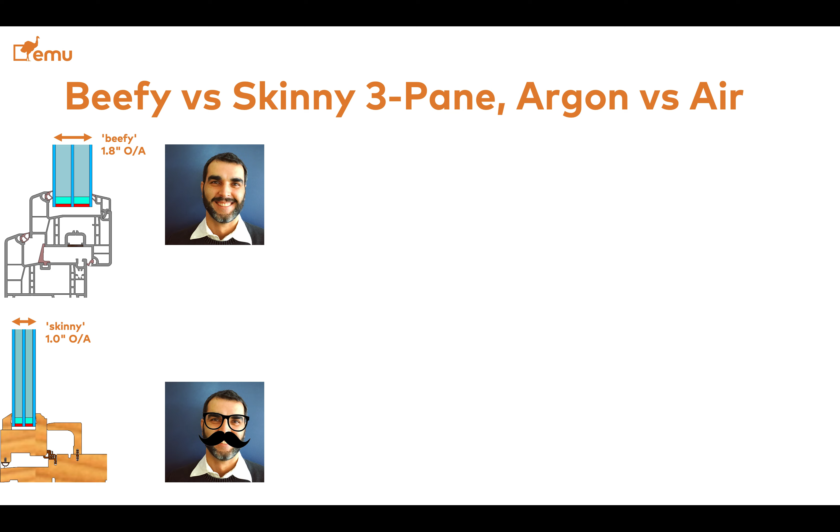But they sell you a triple pane, so you pay the premium for it. The other side of this is that the R value you get from the glass for the beefy one is about R10, including the argon — and we're going to see later about the losses in the argon fill and the durability of this R10 performance — as opposed to an R5 for the skinny triple. So they're both triple pane, and if you don't look closely, they seem the same because it's triple pane, but one has double the R value of the other.

Interestingly, in the US, windows are rated at 0 degree temperature outside, and that condition almost never happens. In this graph, the green line shows the exterior temperature of a typical year in Chattanooga, Tennessee. The yellow horizontal line at the bottom shows the rating conditions for the NFRC, National Fenestration Rating Council, that rates windows and doors in the US. The one in orange, higher, is the European conditions for the European window and door rating. As you can see, for Chattanooga and most places in the country, the European rating conditions are actually more relevant than the NFRC ones. This is something that is impacting how products are developed in the US, and how American products tend to underperform in the field because of this condition.

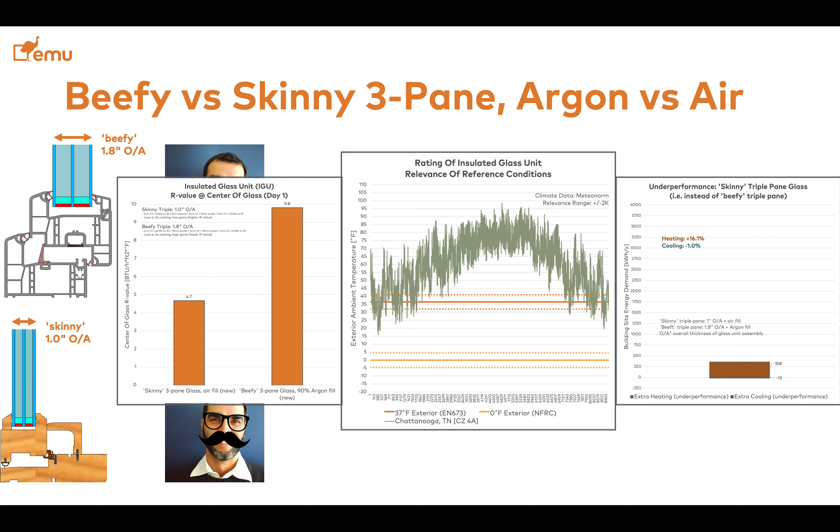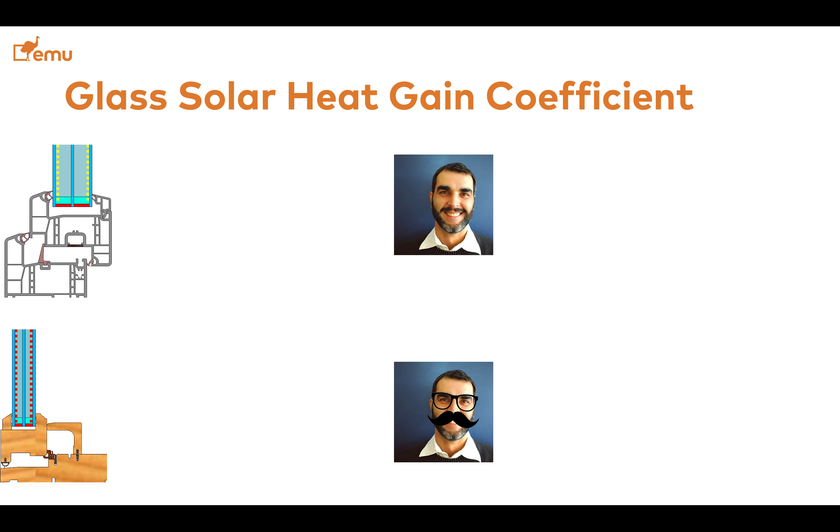Then we talked about the solar heat gain coefficient, which is basically a filter or low-E coating applied on the inside of the glass. The two pictures on the left for the windows show, at the top in yellow, where the low-E coatings are for Enrico's windows, and at the bottom in red dashed, the coating for Enrique's. That is where the low-E coatings are on the inside of the glass, because the coating itself — a soft coating — is basically a powder you can barely see, spread over the glass, but if you pass a finger on it, you would wipe it off. So what these coatings do is reduce heat losses, but also tune up or down how much energy we allow in from the outside, from the sun.

For Enrico, supported by an energy model, he picked medium solar gains, so the coating he picked allows about 37% of the energy from the sun into the building. Whereas Enrique, who was concerned about overheating, picked low gains glass, which only allows about 25% of energy coming in. And Chattanooga is in climate zone combination 4, so it's kind of in between, but still more heating dominated.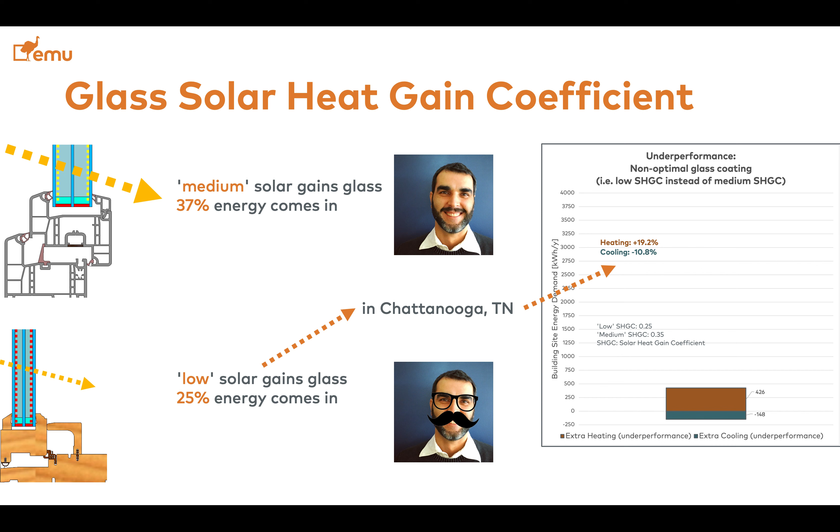Choosing low gains glass instead of medium causes the building to have about 19% more heating and 10% less cooling, because it blocks off more sun in the summertime but also blocks the sun out in the wintertime. So the sum of the two is you still consume more energy because you have not optimized the coating on the glass. Without the support of an energy model, there's no way for you to determine this — this is project specific, climate specific. If you're not making this decision on the type of coating based on an energy model, you're just guessing, and you can swing the performance of the building up and down very randomly.

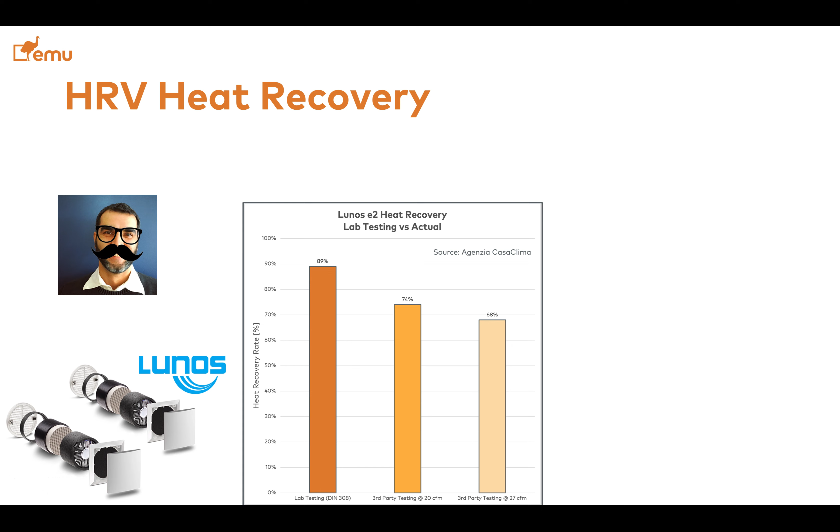Now, we talked about heat recovery ventilation for the fresh air ventilation system, and Enrique went for the ductless because he didn't want to deal with all the ducts for the ERV system. And these Lunos units are rated at 89% heat recovery.

Unfortunately, that rating is based on a very inaccurate standard, this German standard DIN 308. The reason I say that is if your ventilation system has very efficient fans, they move around the air without really causing much heat. An inefficient fan requires a lot of energy to do the job of moving air, and if it's inefficient, it heats up a lot in moving around the same amount of air. A lot of energy gets wasted in the form of heat.

The standard, DIN 308, does not account for this. If your fan is inefficient, it overheats while pushing air around, and that overheat may be read by the standard as, oh, my ERV or HRV is actually recovering a lot more heat, whereas it isn't. So it is a very poorly set standard. And Lunos, unfortunately, only has this very promising rating of 89% heat recovery with the DIN 308.

Now, independent research shows that the actual heat recovery is much lower. It's not 89%, it's actually more in the realm of 68%. So you have a significant performance gap in just selecting these units. For Enrique's building, this leads to needing about 8% more heating and 2% more cooling.

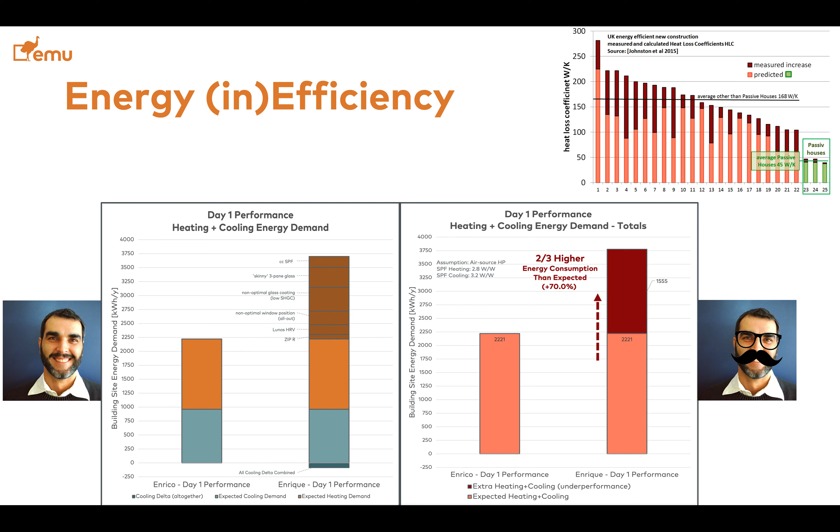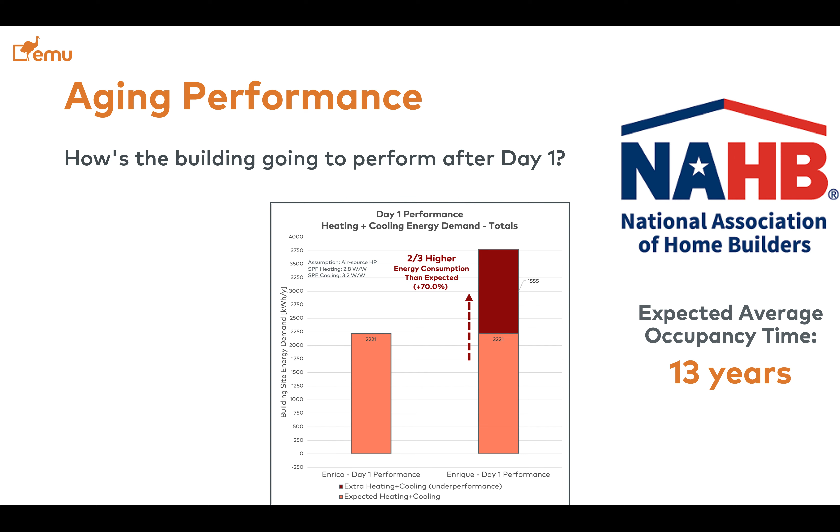Now, let's see how things age over time, and how does this higher performance stand the challenge of time. We talked about an average family staying in the house for about 13 years before they move out again. So what is the change in performance that we can expect from day 1 to year 13, once supposedly that family is going to move out again?

So Enrico got argon-filled glass, and Enrique heard that the gas goes away after just a couple of years, so why bother. So Enrique chose to have air-filled glass units.

So at day 1, Enrico's glass has heat losses of 0.095 BTU per hour per square foot per degree Fahrenheit, because at day 1 the glass is 90% full of argon and 10% full of air, whereas Enrique's are 100% full of air, meaning that the losses are 0.213 BTU per hour per square foot per degree Fahrenheit.

Now, 13 years after, you can typically expect 1% of gas loss per year from argon-filled or gas-filled glass units. A glass unit, if there's a major loss of the seal, that is where moisture gets into the unit and it fogs up so you can no longer see outside. That's the main reason of failure for glass units, and that's not what we're talking about here. If everything works out properly, and most windows do, you can expect statistically 1% of gas loss per year. This is data supported by research both in Europe and in the US.

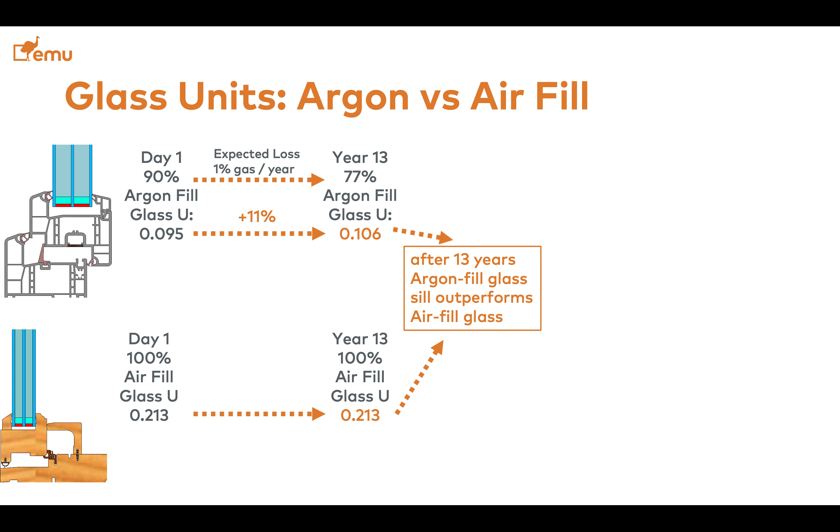So for Enrico, in this case, Enrique has no loss because he started off with just air to begin with. Enrico lost argon along the way, down from 90% to 77%, and this causes a little bit of extra heating.

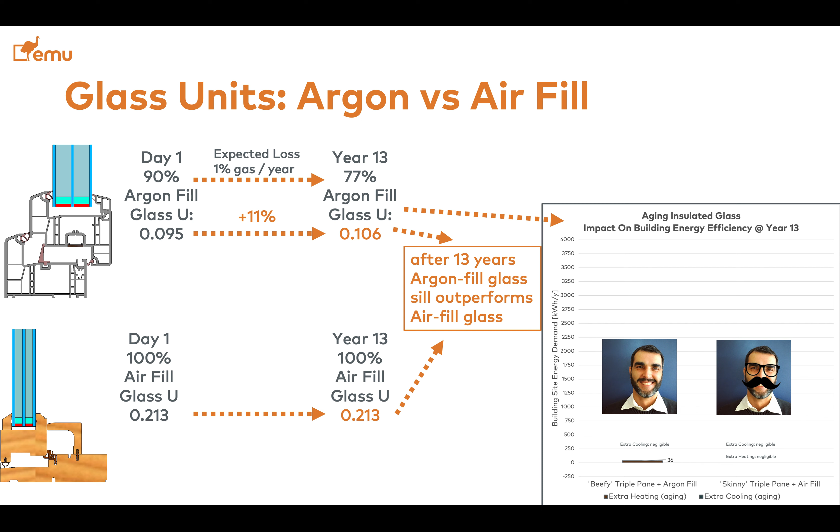I did not write the percentages here, but it does cause some extra performance loss for Enrico. Now for the underslab, Enrico chose EPS and Enrique chose XPS. XPS is nominally more performing than EPS because XPS has an expanding agent that insulates more than air, whereas EPS is just filled with air.

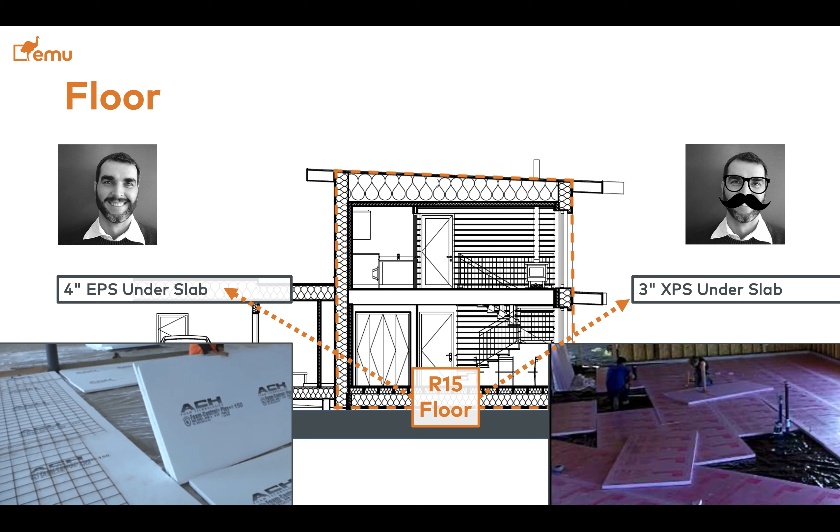So day one, XPS has R5 per inch, but after 10 or 15 years, that R5 drops down to about an R4. So Enrique's underslab insulation is losing its expanding agent, losing performance over time, and this causes some extra heat losses, which increase the need for heating, and in Chattanooga, reduce the need for cooling.

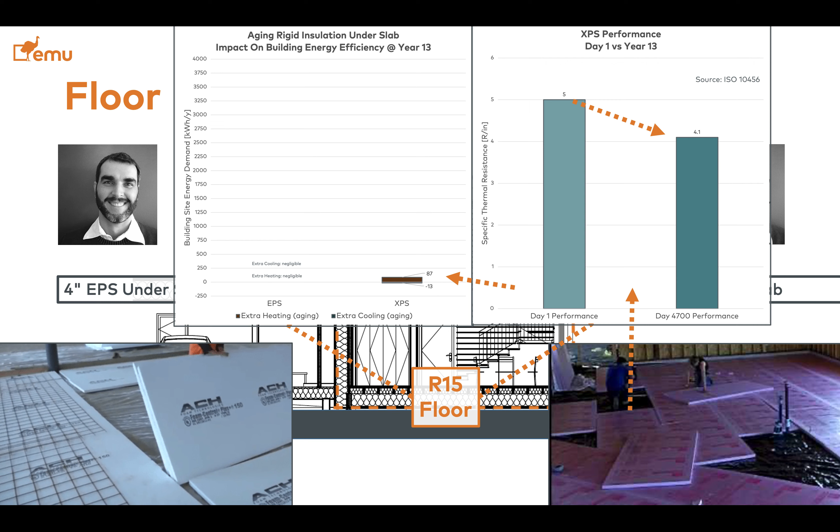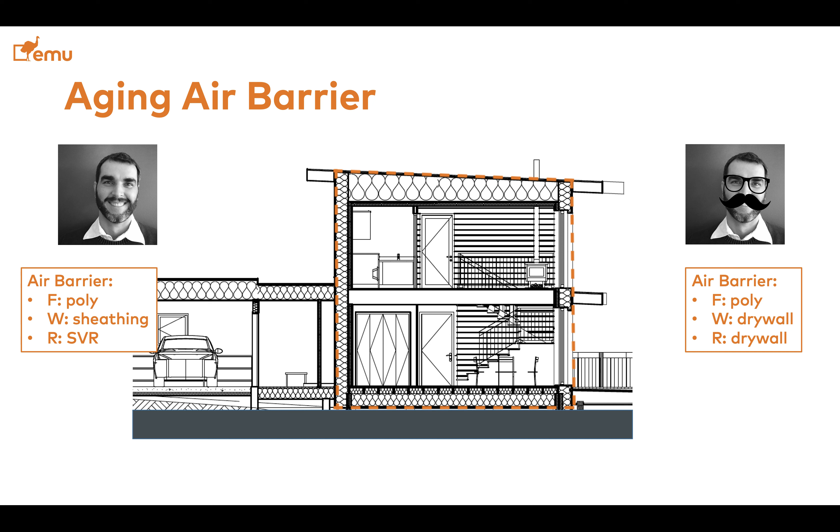On the right-hand side, on the other hand, Enrique had the same poly at the slab, but used drywall at the wall and the ceiling for the air barrier instead. Now, data shows that - I can actually enlarge this here.

Data shows that for drywall, over 10 or 12 years, you can expect about a 0.19 increase in ACH because the drywall is not as durable. Whereas for smart vapor retarders and membranes, you can expect an increase in ACH50 of 0.05, which goes back to what I started with at the beginning of this presentation.

We are lucky that we at EMU work with builders that really want to push the limit and do the best. In our niche, 0.6 is the bare maximum, but buildings hitting 0.3 or 0.4 is normal. So from a 0.4, if you go up 0.2, you almost double, or increase your air leakage by 40-50%, something that becomes noticeable.

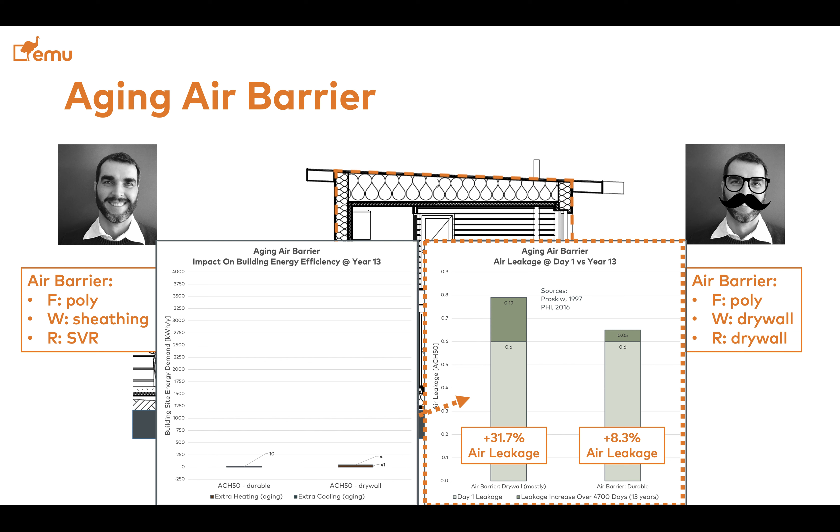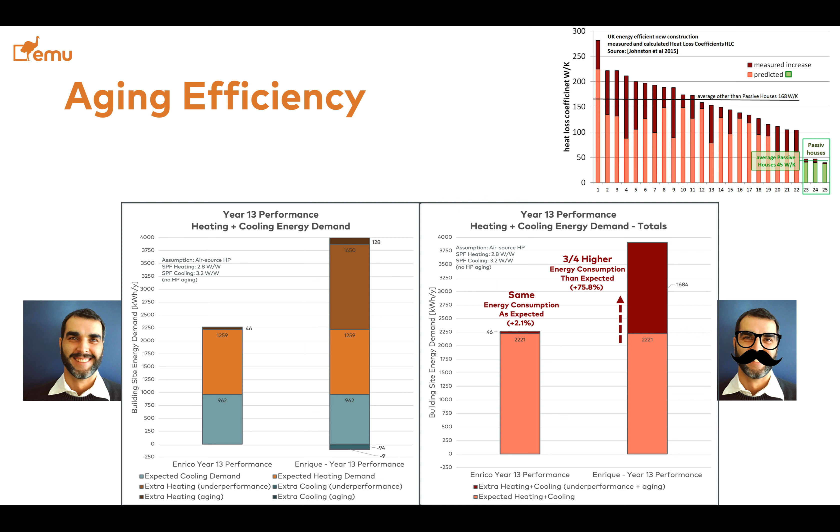This is the impact this change has in terms of energy. So back to the year 13 expectation, we see a little bit of increase, like 2% for Enrico, because of the loss in the gas argon as well as the minimal increase in air leakage. Whereas for Enrique on the right-hand side, after 13 years, the energy consumption for heating and cooling is now 3/4 higher than the initial one - really missing the mark on delivering the promised energy efficiency.

So this was a story to explain what passive house can do for any project in improving living conditions, in terms of avoiding mold and condensation, delivering comfort and durability. The closer we get to zero energy consumption in buildings, the more every single little detail matters. Think about what we saw for the zip sheeting and all the little nails that you would not even consider in a regular project. If you're getting close to zero energy consumption, every single detail like that does matter.

And keep in mind that we're not saying not to use zip R. It's more like you need to be aware of that, because you need to account for that extra consumption if you really want to deliver that super high efficiency to your clients. And whatever the project goals, the performance-based approach allows the team to make informed decisions at any stage of the project. It's really the handrail of building science that guides the project through different stages.

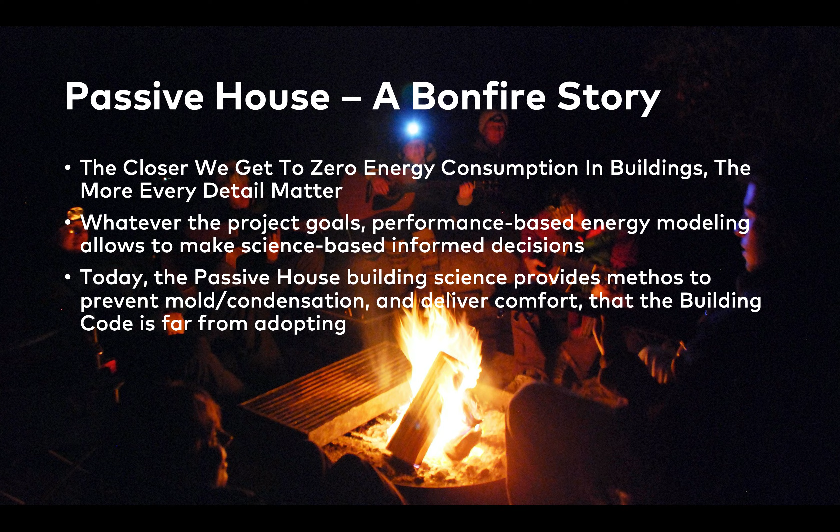And lastly, there are ways to deliver thermal comfort and prevent mold and condensation by design that code is not adopting. Code is decades away from delivering that quality, and Passive House delivers it today. So you can incorporate these methods to improve the quality of your product, whether or not you want to certify the building. So this concludes the presentation. Thank you for your time.